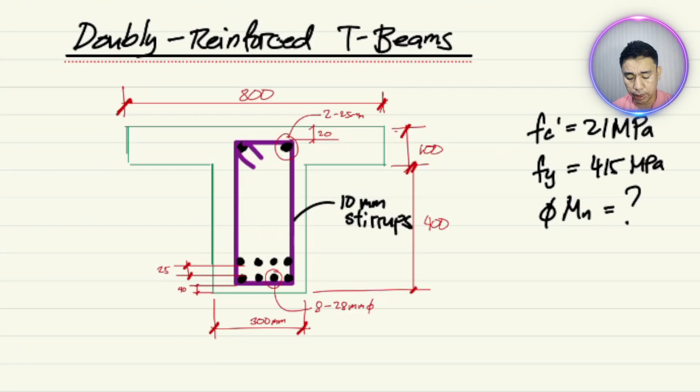Okay, so we finished already about T-beams, which is mostly singly reinforced. Now we will move further to doubly reinforced T-beams. So this is a T-beam and then doubly pa talaga yung reinforcement. So can you imagine the possible steps in designing or investigating a doubly reinforced T-beam.

Remember in doubly reinforced, may mga calculations pa tayo na mag-assume ng stress ng F ng steel, kung mag-yield ba siya or not. And then meron tayong iteration ng calculations because of that assumption. And then we need to check that assumption if that is correct.

Now sa T-beams naman, i-check naman natin yung compression area, kung mas mababa ba sa thickness ng flange, lower than the thickness, deeper than the thickness of flange. So iba naman yung analysis kung A is less than T. If A is greater than T, meron na yung Z.

So pag pinagsabay mo ito, doubly reinforced and then T-beam, so you expect a medyo complicated na calculation. But the step is the same. Okay, so we just have to keep iterating. So that's why I'm encouraging you to always solve a lot of problems, so in that way we can familiarize the steps in designing.

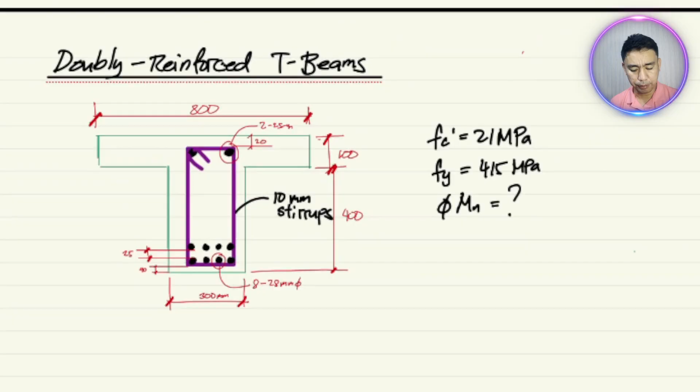So I will go directly to examples, solve examples for this one, for the doubly reinforced T-beams. So we have here in this example, sorry, we have a T-beam. Okay, I'll just zoom in.

So a T-beam, yung flange niya is 800 mm. This the unit is millimeter. And then ang thickness ng flange is 100 mm. Okay? And then the BW, ang BW natin is 300 mm. And this, meron siyang 10 millimeter na stirrups.

Ang stirrups, we will learn that after this topic about stirrups. But let's say that is a stirrup, 10 mm, and then yung nakapaikot na reinforcement. So meron tayong sa top, dalawang 25 mm, yung black ito, dalawang 25 mm. This is 25 mm, and then yung clear distance sa top is 20.

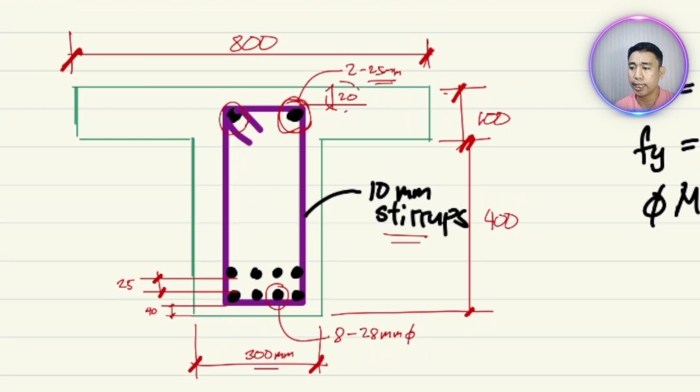Actually, sana hindi na ito sinali dito yung mga calculations. Mas mabuti kung theoretical na lang sana kasi AS prime and then AS sa baba, just like the doubly reinforced. Pero in the book, sinali pa niya itong mga distance. We could deal on this topic on the last part, yung sa detailing. But for the sake ng book, sige, sabay na lang natin ito.

So ang binigay niya dito na given is yung 20 mm. Yung clear distance yun siya, from the top ng beam to the topmost fiber ng stirrups. So that means to solve for D prime, kailangan pa nating i-calculate yung sa gitna ng stirrups hanggang dito. That is actually D prime, right? So we need to consider the diameter ng bar and then the diameter ng stirrups and then the 20 millimeter.

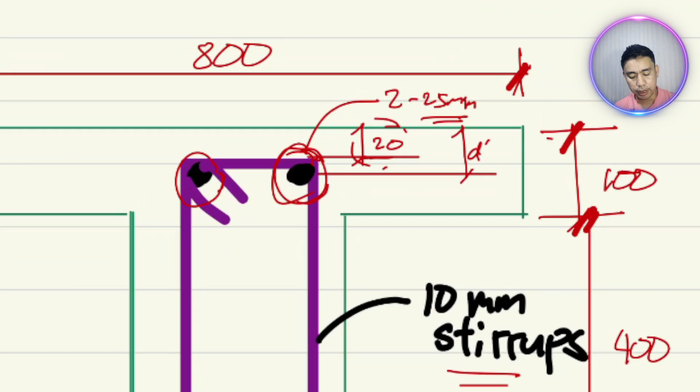Okay, the same rin dito sa baba, meron tayong reinforcement na nakaganyan, parang nakahanging. I don't know how to do it in practice, minsan gina-kumpul-kumpol na lang ito, bundle na siya. Pero theoretically, meron siyang spacing na 25 mm, at yung clear distance dito is 40. And then these are 28 mm diameter. Ang phi nito is means diameter, ha, so 28 mm diameter.

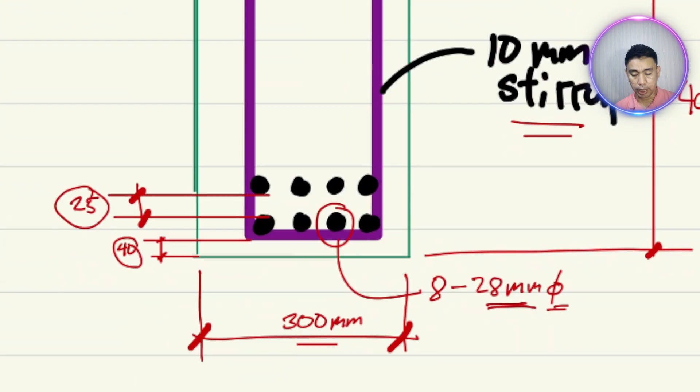And then the given FC prime is 21 megapascal and FY is 415 megapascal. Let's solve for phi mn, okay, this is actually phi mn.

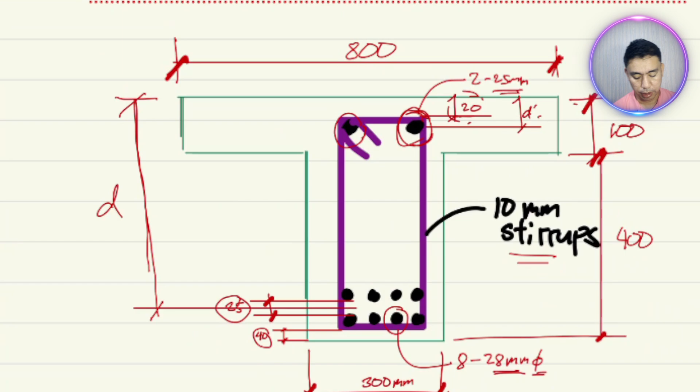So the first thing we need to solve is let's solve first the D prime and then the D. Ano yung D? Ang D is the distance from the center of the reinforcement, tama, right? Let me correct, parang ganyan, ito yung D natin, right? So paano yan? Let's solve for D.

So our D here is equal to, ano yung total depth? I-add natin itong total depth natin, 100 and 400, and then i-subtract na lang natin itong mga distance dito. So this is actually, D is equal to 500. Ang 500 galing yan dito sa 100 and 400.

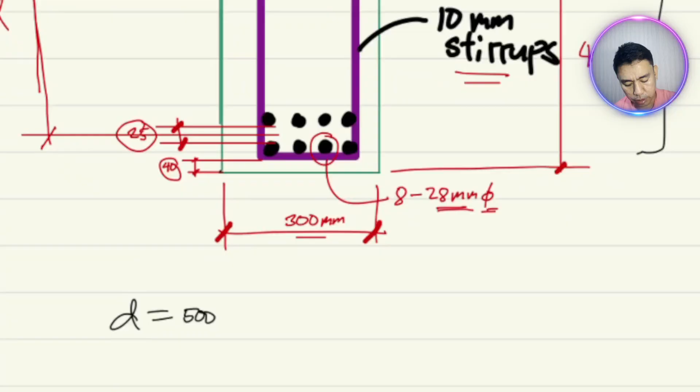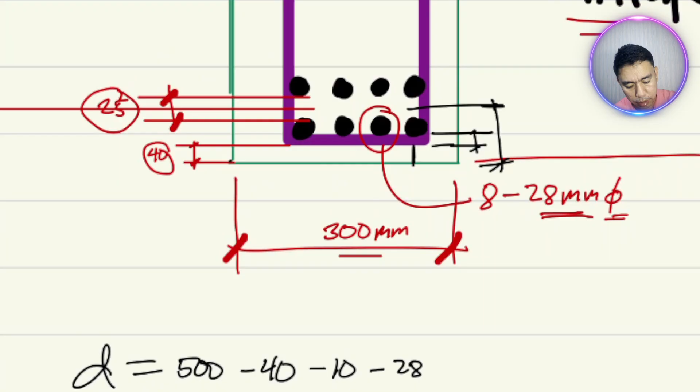So 500 minus the clear distance of 40, right, and then minus the diameter. So ito yung clear distance, 40, and then diameter ng stirrups, so this is minus 10, kasi nga 10 mm itong diameter. So that distance is 10. Minus the diameter ng rebar sa baba, sorry, minus 28. Okay, and then halfway lang. So actually ito lang yung ano, yan, so halfway, that is, ano yung clear distance? 25, right? So this one will become minus 25 over 2, halfway ng 25. Yan yung magiging D.

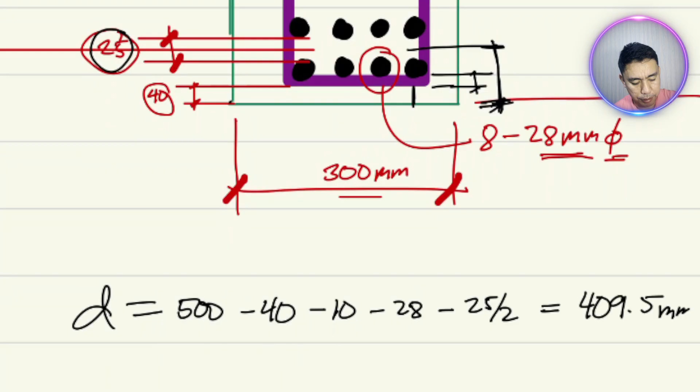So this will result to 409.5 millimeter. Okay, how about our D prime?

Our D prime natin sa taas, right? So i-add naman natin dito kasi galing from the top tayo. So 20 plus diameter of stirrups plus half of the diameter kasi nga sentro lang tayo ng reinforcement. Ito yung D prime. So this will be 20 plus 10 diameter ng stirrups plus halfway ng diameter ng main reinforcement 25 over 2. So this will be 42.5 millimeter. Pangit ng writing, okay.

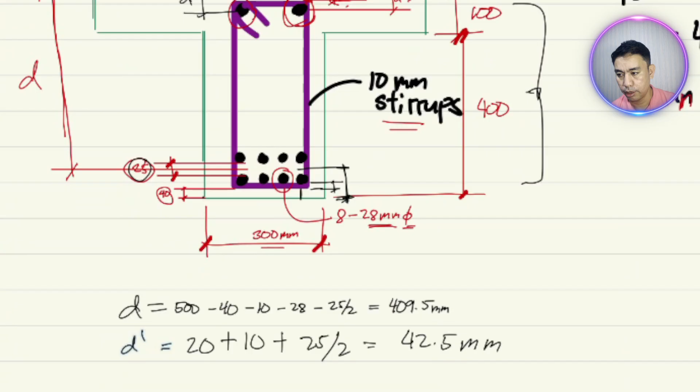So ang stress analysis naman natin dito, ano siya, T-beam. So ang first is yung sa T-beam. Sa T-beam, di ba, dalawa yung compression, meron tayong C1 at saka C2, and then meron tayong T1. Siguro ipakapalin ko na lang. So ito yung C1, C2, and then T1, right? So dapat magka-equal itong C1 plus C2, it should be equal to T1.

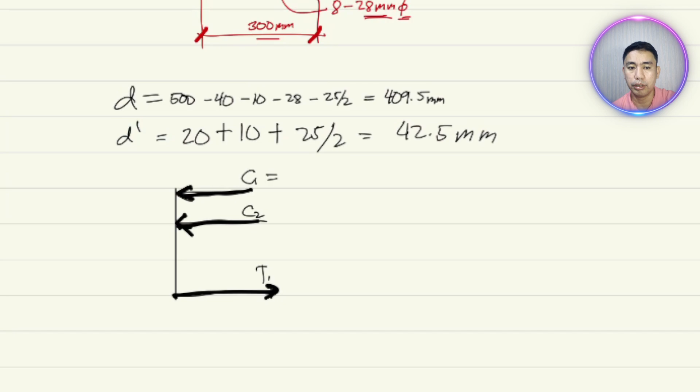Okay, ano yung C1 natin? Ang C1 is yung compression ng flange, right? So this is basically 0.85 FC prime times area. Anong area? Thickness ng flange times BF. Yan, so kumbaga kung yung sa T-beam natin, kung yan yung T-beam natin, ito yung area ang ginamit ko sa C1, ito yung C1 alone sa taas. Ang sa C2, ang sa C2 is dito.

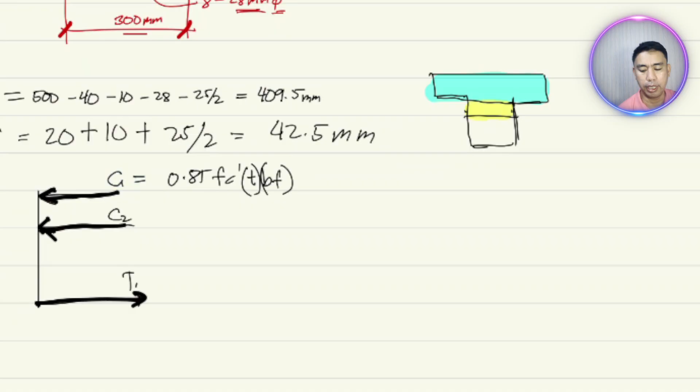Ayan, so ito yung sa C1, ito yung sa C2. Okay, so if I'm going to write this here, ang C2 natin is equal to, kasi concrete ito, so this is 0.85 of FC prime times area. Ano yan? This is actually from the distance Z, and then this is our BW. Okay, so ang area nitong naka-yellow is Z times BW. Ito sa taas is our BF.

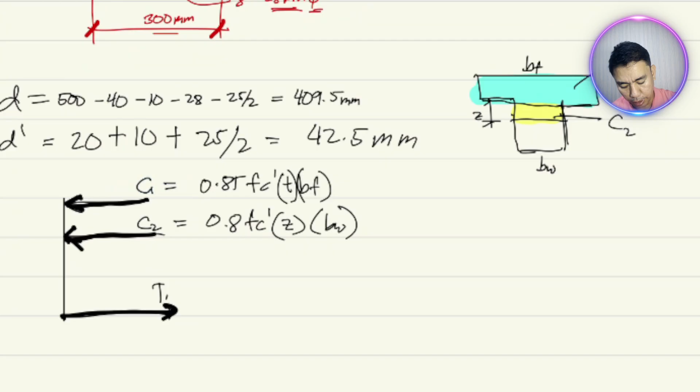And this should be equal to tension 1, which is AS1, yung sa baba, times AS1 FY. Okay, if, actually FS yun siya. FS, okay.

Sorry, wait, I have runny nose.

So yung sa doble naman, kasi this one is, the first one is yung, actually this is the MU1. Yun yung capacity ng first couple. Ang MU2 is yung sa second couple.

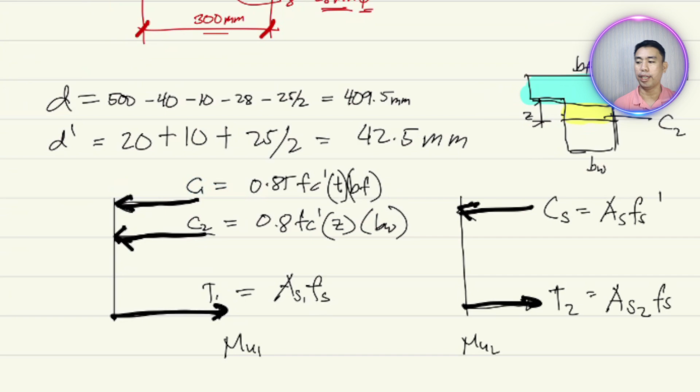Ano ngayon? This is the compression due to steel and then tension 2. Ano yung compression due to steel? Simply AS FS prime. Ang tension 2 is just equal to AS2 times FS. Okay, so yun yung free body diagram natin.

Now, page... So dito naman tayo mag-assume. We need to assume first. Okay, assume that all steel yields.

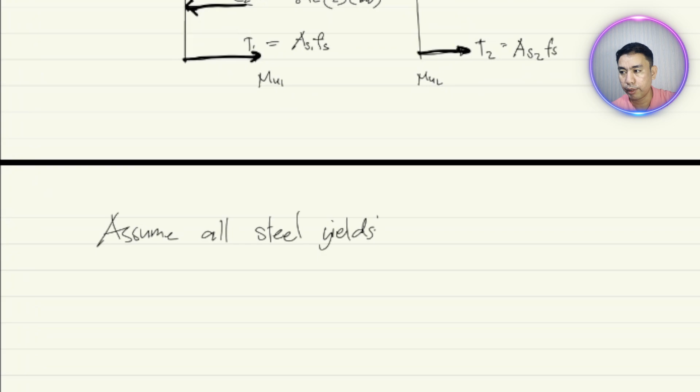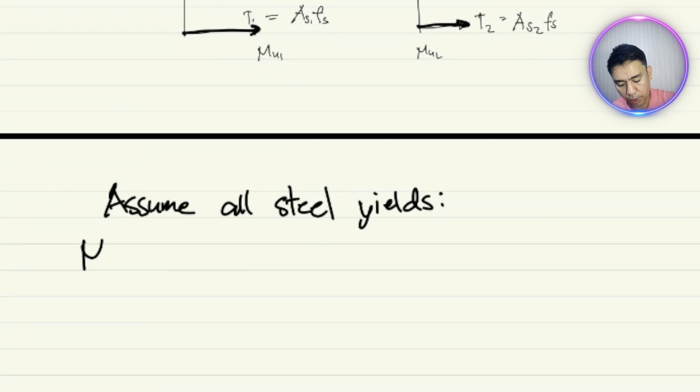So anong mangyari? Using MU2, itong result sa MU2. Let me delete this one. Assume all steel yields. So using the equation sa MU2, ito actually ang ginamit ko sa MU2. This equation.

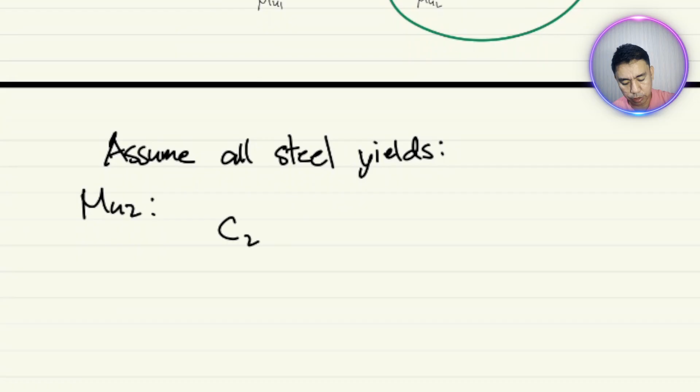Okay, so it will be C2 is equal to T2, right? If you sum forces along horizontal is equal to 0, so CS is equal to T2. So why did I put C2? This is supposed to be CS. So anong mangyari? AS prime FS prime is equal to AS2.

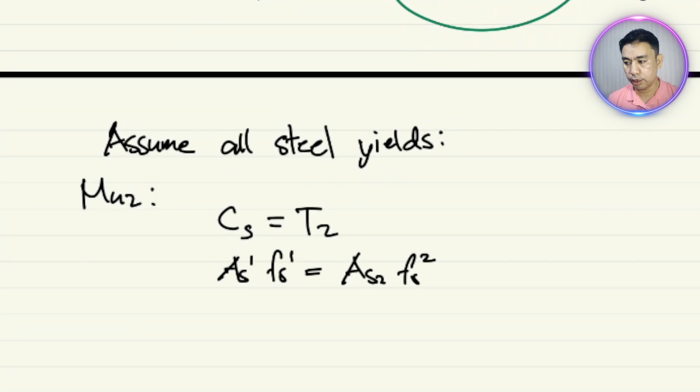FS2. Since FS, nag-assume tayo na all steel yields, meaning kung mag-yield, ang value is the Fy. So do we have AS prime Fy is equal to AS2 Fy? Bakit naging square dito? Prime pala yan, AS2, not prime. Sorry, AS2 Fs. So pareho sila Fy, that means cancel lang ito. Kasi nga Fs is equal to Fs prime equals to Fy.

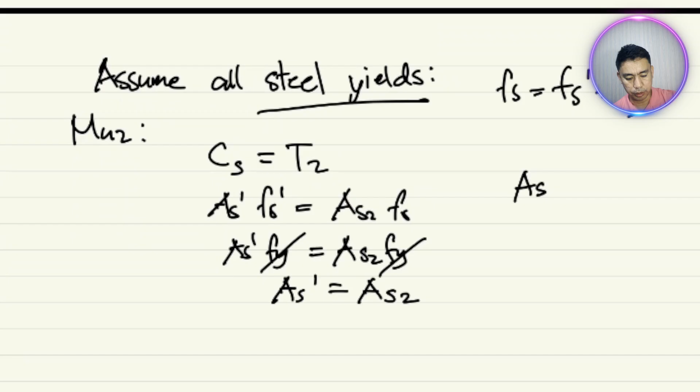So that means ang As prime natin is equal to As2. So by the way, what is our As2? As2 sa taas, ayan, dalawang 25 mm.

So solve na lang natin. 2 times pi over 4 times 25 squared. This is actually 981.748. Ano pa pala? Okay, and then ang AS, yung

total reinforcement sa baba, AS is equal to 8 na 28 mm. Pi over 4 times 28 squared. This will equal to 4,926.017.

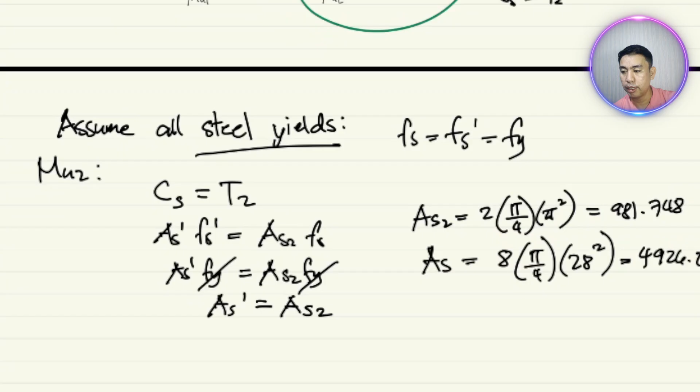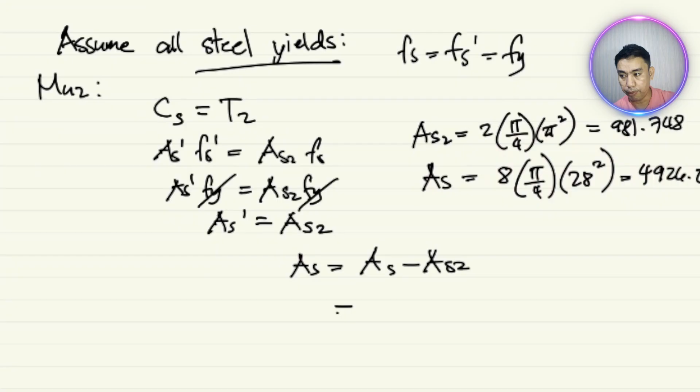Okay, so from there, since AS prime is equal to AS2, that means AS1 is actually AS minus AS2. So ang value ng AS1 natin, para saan yung AS1? Actually dito yun siya, ito yung AS1. Para ma-solve natin yan mamaya.

That equation, so AS1 is equal to AS minus AS2. So this is 4,926.017 minus 981.748. So this will equal to 3944.269. Okay, so meron na tayong AS1.

Ang point ng pag-solve ng AS1 dito para magamit natin ito na equation. This equation. Okay. So ano yan na equation?

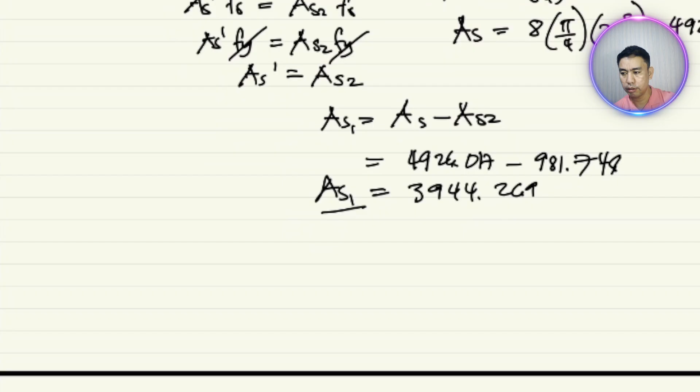So at first we will assume na isang isang area muna itong dalawa, C1 and C2. Okay, so using that first equation, using MU1 na equation, saan yung MU1? Ito na equation, MU1.

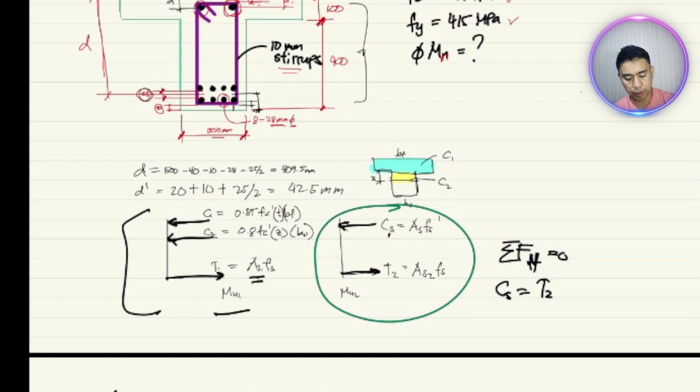So this is the compression of concrete should be equal to tension 1. So ipagpalagay mo natin na ang compression ng concrete is 0.85 FC prime times area of concrete, right? Yung area ng concrete under compression only. So this is equal to T1. Ano yung AS? T1 natin is AS1 FY. Okay?

So bakit natin sinolve natin ang AC? Ang point dito is masolve yung AC. Kasi nga pag masolve natin yung area ng concrete, i-check natin, ito yung required na area ng concrete. I-check natin kung ang area ng concrete actually na nag-resist is greater ng area ng ano siya, ng flange.

So kung greater than area ng flange, that means T-beam analysis. Pero kung less than area ng flange, meaning rectangular beam analysis siya. Okay? Remember that one, yung T-beam is parang it will act as rectangular lang siya kung ang A is less than T. Okay, so kaya kailangan natin i-solve yung AC.

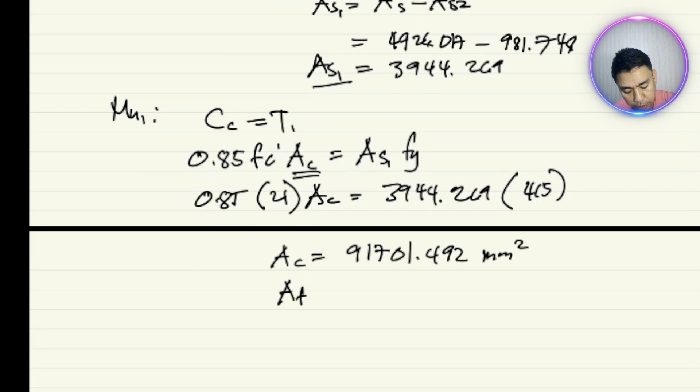So ang point ko dito, pag found out natin na greater than area ng flange siya, then that means T-beam ang analysis. But if less than, then singly reinforced, rectangular analysis lang siya.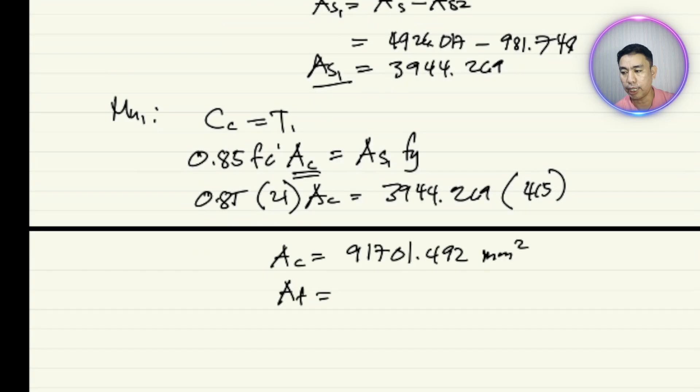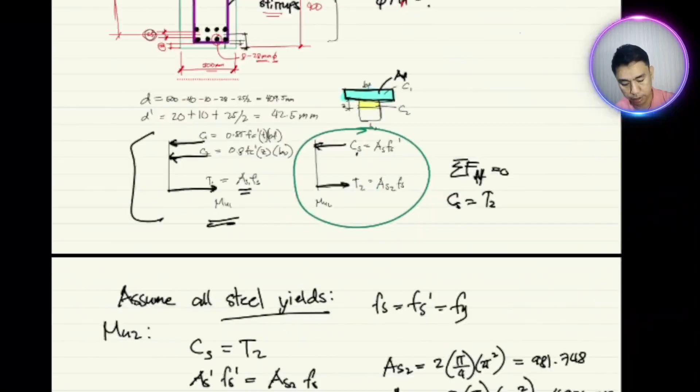So ano yung area ng flange? Ito yung dinamin ko na area ng flange, ito actually, yan, area ng flange. Okay, so what is that? That is just 800 times 100, right? So ang area ng flange natin is equal to 800 times 100. This is 80,000.

So this is 80,000. Compare mo sa area ng concrete, 91,700. So that means greater siya. So ang area ng concrete is greater than AF. So that means yung area ng flange alone is not enough for T-beams.

Kailangan pa niya mag-expand sa baba, dun sa web part. So hanapin natin yung Z. Itong Z actually, yan, this one, Z. Hanapin natin yan na value, kasi meron naman tayong area required ng concrete.

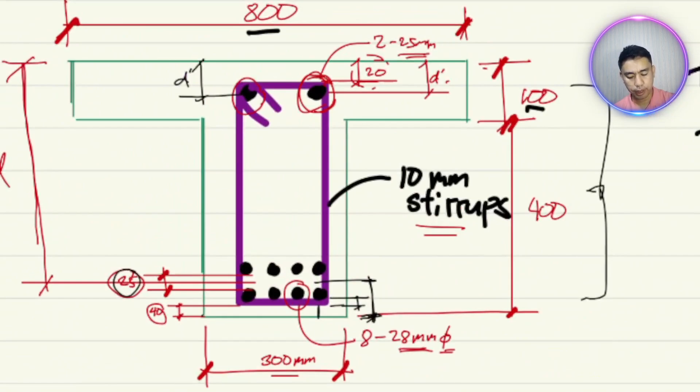So we can use that value. Area of concrete is equal to area of flange plus, ano yan siya? Itong Z. Actually dito yung, if you look at here, yan na area sa baba. Okay, which is ito yung Z natin, right? So that is just Z times 300. Can look at here, Z times 300.

So going back here, this is 300 Z. Let's input the value. We have 91,701.492. Area of flange 80,000 plus 300 Z. Then we can have the value of Z, 39.005 millimeter. So ang total A natin, hindi yung beta 1C, okay?

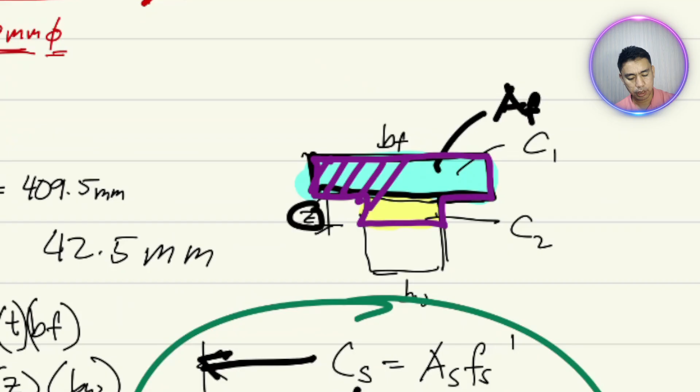Wala pa tayo dyan, doon. So ang A natin is ang total depth ng compression. So what I'm saying is ito na lahat ang area ng concrete under compression. Yan. So hindi na siya rectangular, T-beam na siya. So ano yan na area?

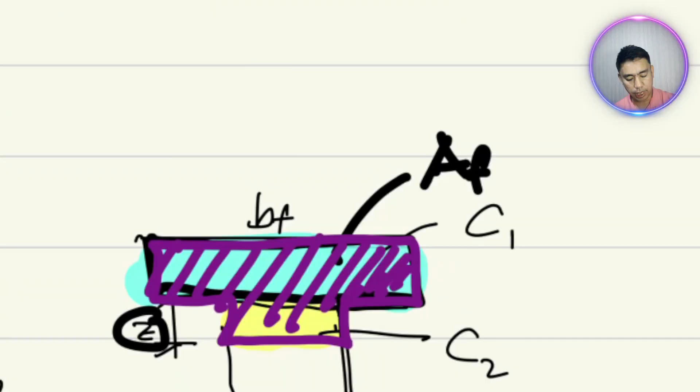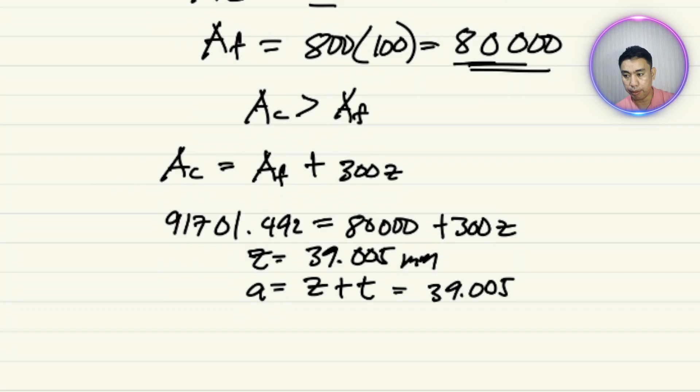So ang total area, ito yung distance na A, right? So let's go back here. It will be A. So ang A natin is equal to Z plus the thickness ng slab. So this is equal to 39.005 plus the thickness 100. So this is 139.005. So dito na tayo yung C.

Ang C is equal to A over beta 1. By the way, ang beta 1 natin, 21 megapascal man yung Fc prime, so that is automatically 0.85. So A is 139.005 over beta 1 of 0.85. So what will happen, this is 163.535 millimeter. So yun yung C.

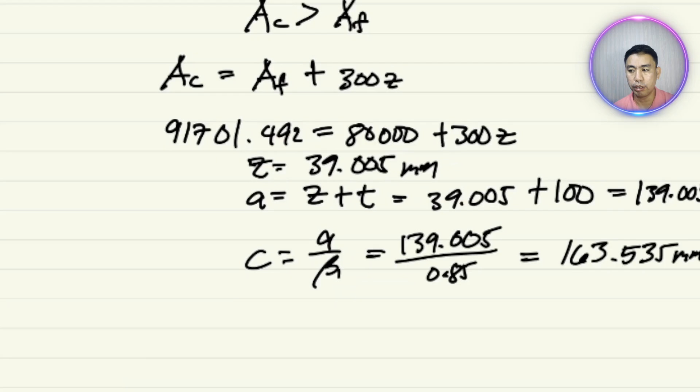So ang point dito, masolve natin yung C. Bakit? We need to check your assumption. So check assumption. Ano yun? Fs is equal to 600 times D minus C over C.

So this is 600 times D. D natin is 409.5 minus 163.535 over 163.535. This is equal to 902.431. So this is greater than Fy. Ang Fy natin is just 400, sorry, it's 415. So this is greater than Fy. So okay yung assumption natin kasi we assume na greater than Fy siya lahat.

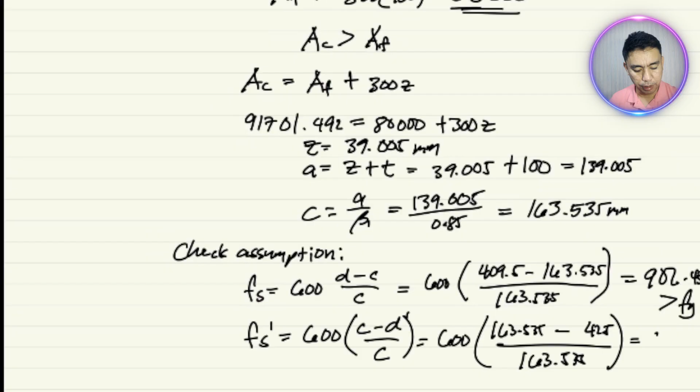Yung first, okay siya. How about Fs prime? Ang Fs prime is 600 times, sorry, this should be C minus D prime over C. So this is 600 times C. Ang C natin is 163.535 minus D prime 42.5 over C 163.535. So this will be 444. So this is still greater than Fy. That means tama yung assumption natin, compression yields.

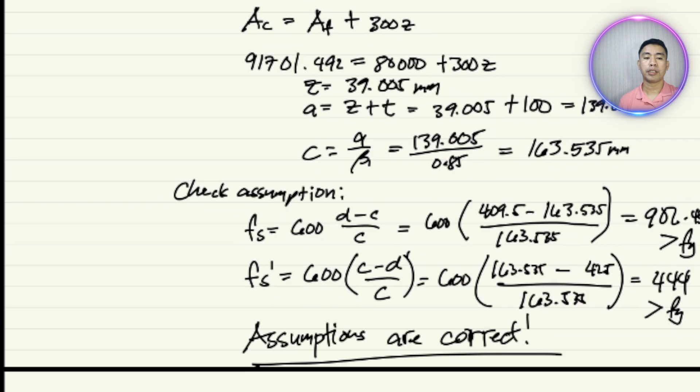So let's say assumptions are correct. So what will happen? Then we can solve the phi Mn. Ano yung phi Mn natin? Is equal to phi times C1 times D minus T over 2. Ito yung formula natin, okay, plus phi times C2 times D minus T minus Z over 2. Then plus phi of compression due to steel times D minus D prime.

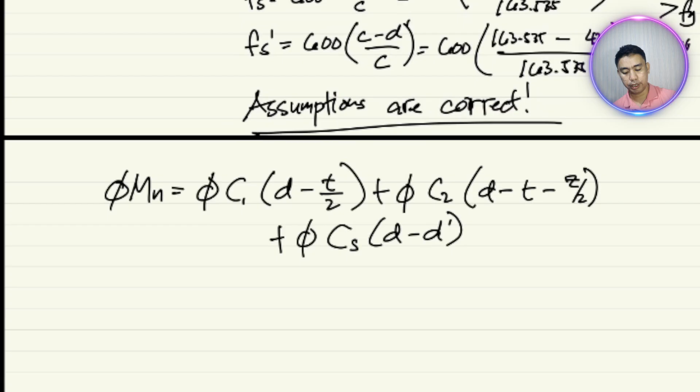By the way, what is phi here? Ang phi, magbase yan siya sa Fs natin. Kung ang Fs natin is greater than 1,000, then that is 0.9. But if less than 1,000, but greater than Fy, we need to use the transition: 0.65 plus 0.25 times 902.431 minus 415, ito yung Fs, minus over 1,000 minus Fy of 415. So this is equal to 0.858.

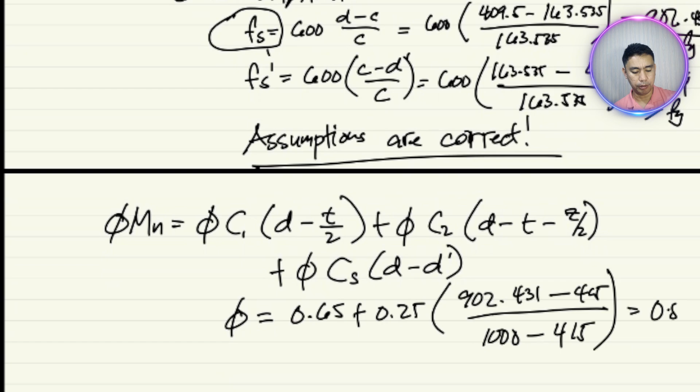So we can expand this actually. Phi Mn is equal to phi, ano yung C1? 0.85 Fc prime, thickness of flange, times Bf, times D minus T over 2, plus phi times 0.85, ito yung C2, Z Bw times D minus T minus Z over 2, plus phi. Itong Cs, compression ng steel, CS is equal to As prime Fs prime, D minus D prime.

Alright, so let's input the value here. Ang phi natin is 0.858. Okay, medyo mahaba ito. 0.85 times Fc prime 21 times thickness ng flange 100 times Bf is 800, times 409.5 minus 100 thickness over 2. That is actually A for the flange.

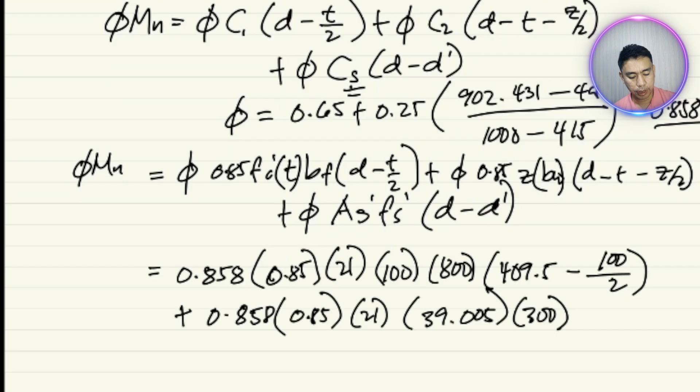Then dito ko lagay sa baba, plus 0.858, yeah that should be correct, 858 times 0.85 times 21 times 39.005 times 300. Then multiply it by 409.5 minus 100 minus 39.005 over 2.

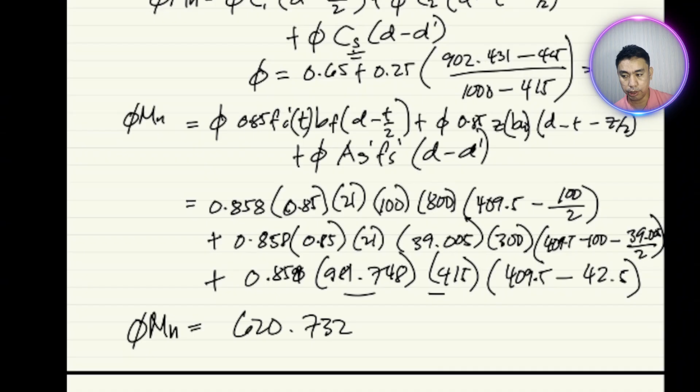Then plus yung compression ng steel, 0.858 times 981.748 times 415, that is As Fy, okay, times 409.5 minus D prime 42.5. So if you will calculate this one, you will come up with a value of 620.732 kilonewton meter. Okay.

So the good thing here is nag-assume tayo na ang steel is nag-yield. And then it turns out na nag-yield talaga yung steel. Now what if hindi siya nag-yield? So let's proceed to another example here.

So in the second example, we have 800 yung Bf, thickness 100, idiretso na ko na lang bigay yung mga given. Okay, and then D is 412.5 and then D prime is 40. Bw is 300. Then As natin is anim na 25mm. And then As prime, dalawang 20. Fc prime is 21 megapascal and Fy is 415. Let's solve for phi Mn. Okay, phi Mn.

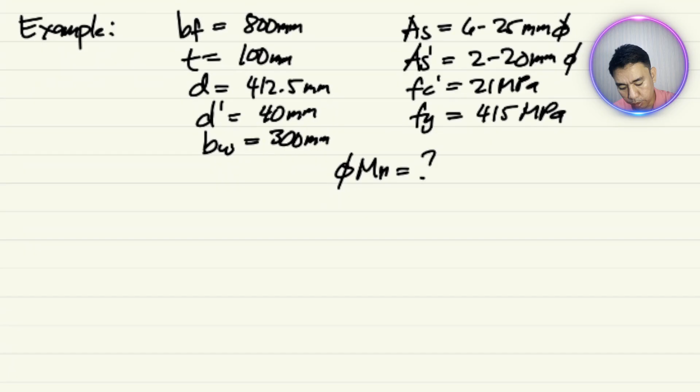So I'll jump directly to assumption. Assume all steel yields. So we have compression of steel equal to tension 2, so this is AS prime Fs prime equal to AS2 Fs. But since Fs prime is equal to Fs is equal to Fy, kasi nag-assume tayo na mag-yield itong dalawa, equals to Fy, so this one will be cancelled. So ganun pa rin, yung AS prime natin is equal to AS2.

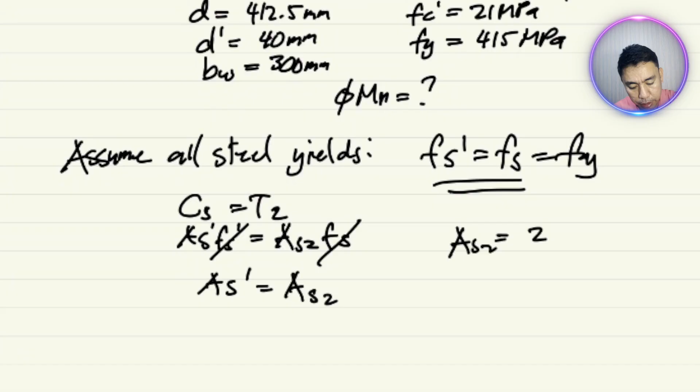Ano ba yung AS2 natin? Ang AS2 natin is dalawang 20 mm. 2 times pi over 4 times 20 squared. This is equal to 628.319.

Okay, ang AS1 natin is equal to AS minus AS2. Actually galing sa equation na AS is equal to AS1 plus AS2. So practically, yung total area ng steel sa baba ay nahati siya to AS1 and AS2. Wherein part ng yung AS1 natin is for the first couple, yung area ng concrete versus steel.

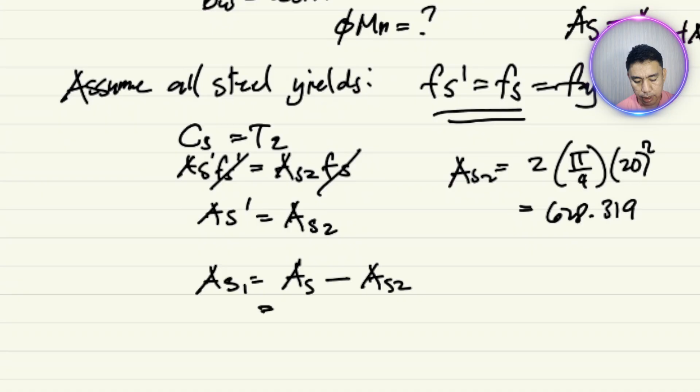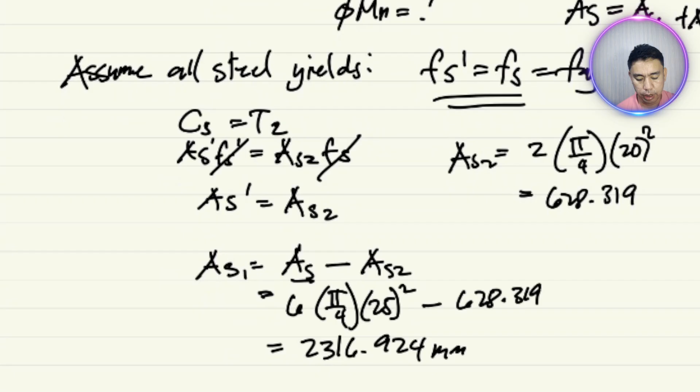Ang AS2 natin is for the second couple, yung steel to steel. Okay, so yung AS1 natin isolve natin. Ano yung total AS? Meron tayong total AS, 6 na 25 mm, so we can write 6 times pi over 4 times 25 squared, right? That is basically pi d squared over 4, merong anim, so times 6 minus 628.319. So this is 2316.924 mm squared. So let's proceed to next equation.

C compression ng concrete is equal to T1. So ito, solve naman tayo ng area ng concrete. So what will happen, this is 0.85 Fc prime, area ng concrete. I-generalize muna natin itong dalawa, and then i-check natin sa area ng flange. AS1 times Fy.

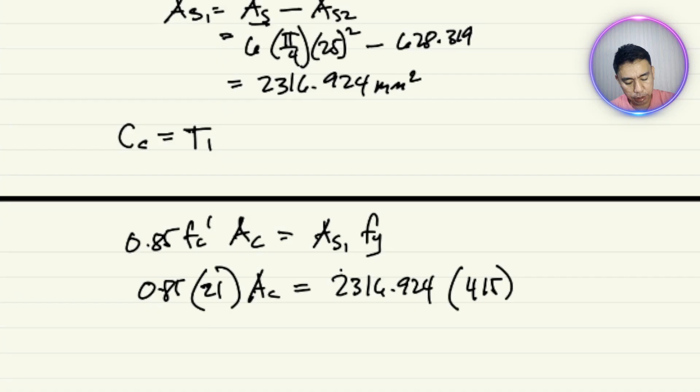Sorry for my runny nose. 0.85 Fc prime is 21 times area ng concrete is equal to AS1, 2316.924, times Fy. Nag-yield siya, so this is 415. Solving for AC here, AC is 53866.861 mm squared.

Ano yung area ng flange? Ang area ng flange is 800 by 100, so this is 80,000 area ng flange. Ang kailangan lang ng area ng concrete is only 53. Ang area ng flange is 80, meaning sufficient yung area ng flange to combat the tension.

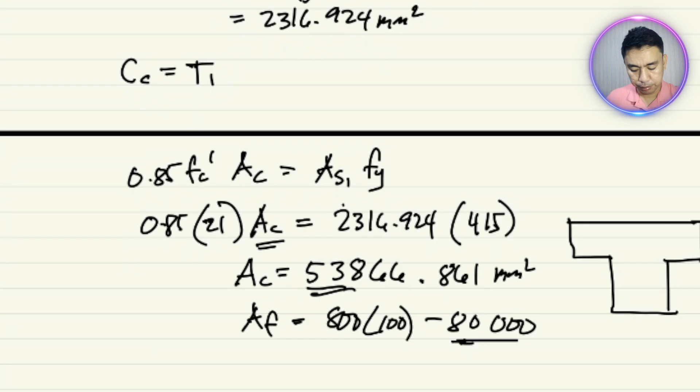So what will happen sa T-beam natin, if I will draw here illustration, yan, ito yung T-beam natin. Hanggang dito lang yung compression area. If I'm going to, yan, kung makita nyo, yan lang yung compression area. So the good thing kung ganito is automatically yan na yung A. Okay, then you don't have to solve for Z. Yung Z is yung sa below pa yan ng flange.

My apology, nag-hang up yung tablet ko. Wait, nag-hang yung tablet ko.

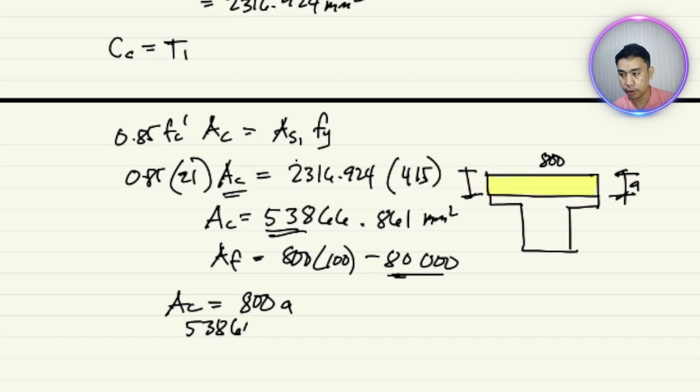So solve natin itong A. Ano yung A? A, well, that is basically 800, so ito yung 800, right? So ang area ng concrete, yung area ng yellow, 800. So area ng concrete is equal to 800 times A. Okay, meron na tayong area ng concrete. This is 53866.861 is equal to 800A.

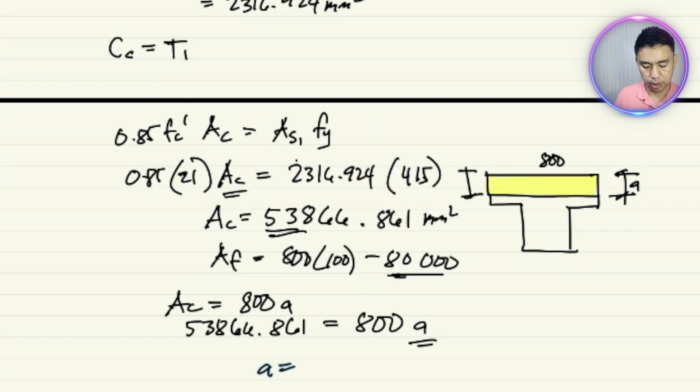Solve for A, so ano ngayon yung A? Wait, bakit hindi magalaw yung, let me, ito na, gumalaw na. So ang A natin is just 67.334 millimeter. So tingnan nyo, ang A is just less than 100, so hindi na ubos yung buong flange natin.

So given the A, we can solve for C, right? A over beta 1. Beta 1 natin is 0.85. So this is 67.334 over 0.85. So this is 79.216. From here, we can check our assumption. Okay, so check.

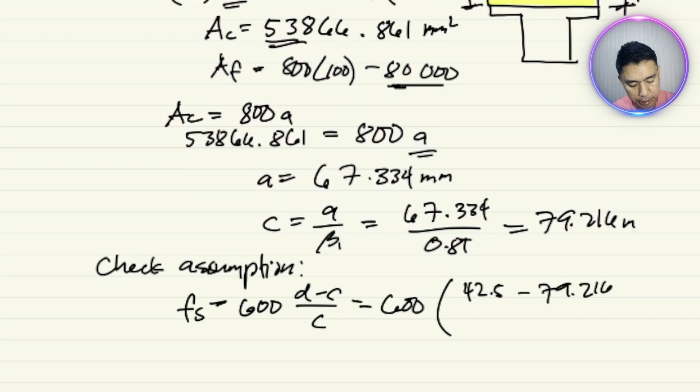Check natin yung assumption. Ano yung Fs? 600 times D minus C over C. So this is 600 times D 412.5 minus 79.216, to yung C, 79.216. This is equal to 2524.369. So this is 2524. This is greater than Fy. So tension still yields.

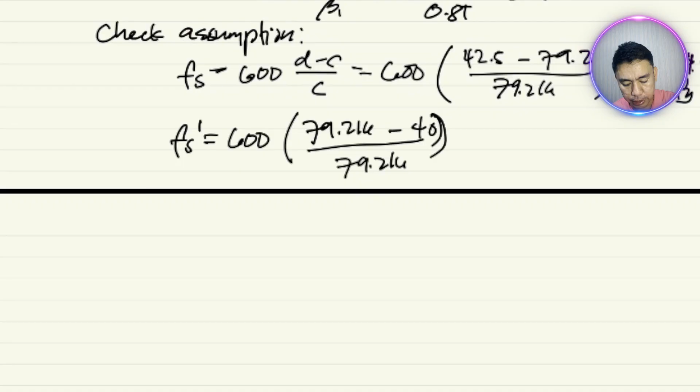How about, let's add, sorry, Fs prime. 600, I'll jump directly to the value. 600 times 79.216 minus d prime of 40. Divide natin sa 79.216. This is equal to 297.031. So, see here, 297, this is less than Fy, which is less than 450.

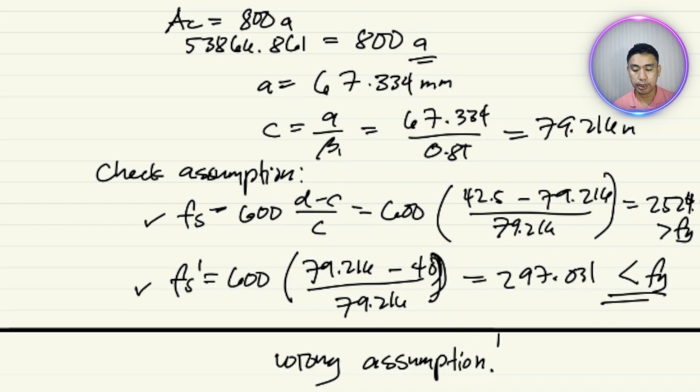So meaning, wrong assumption. Mali na yung assumption natin. So mag-assume naman tayo ulit. What will happen? Kung mag-assume tayo, kasi ang lumabas dito, ang Fs nag-yield, ang tension nag-yield. But yung compression still is not, hindi nag-yield.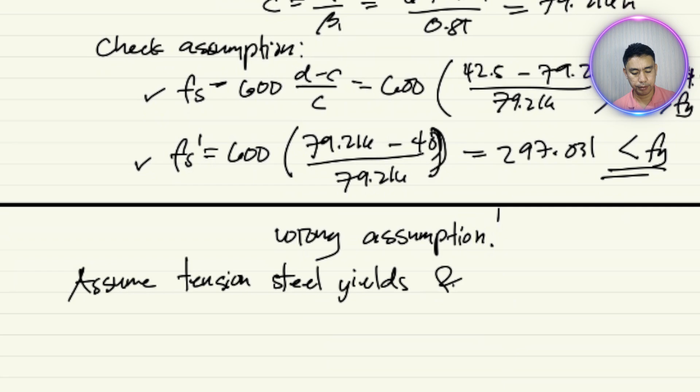So ang next assumption natin, ano na natin, conform na natin sa output natin. Okay? So assume tension steel yields and compression steel, ah sorry, compression steel does not yield. So ang tension steel nag-yield, but ang compression sa taas na steel hindi nag-yield.

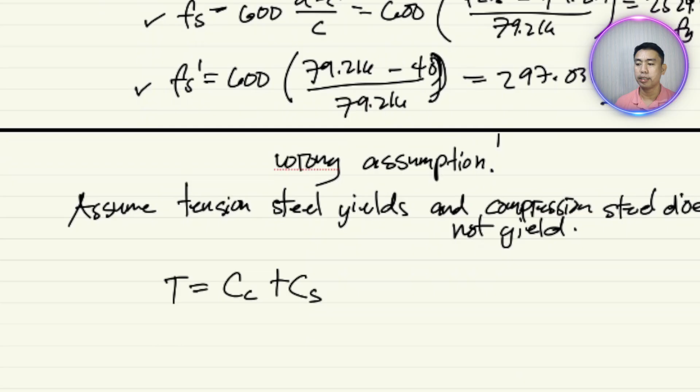Okay, so let's go back to the equation. Tension is equal to compression ng concrete plus compression ng steel. So ano yun? Tension, ano yung tension? AS Fs is equal to 0.85 Fc prime A BF, okay, A times BF, plus AS prime Fs prime.

Okay, so ano yung AS? Hindi natin solve yung S, no? So sulat lang natin: 6 times pi over 4 times 25 squared.

So ito sa tension, ito yung tension steel. Fs natin, so ang assumption natin dito nag-yield siya, so we can put 415. So yun lang yung difference. Kung ano yung in-assume natin na mag-yield, then we can put directly the value of Fy. Then doon yung Fs na equation sa hindi nag-yield na assumption natin. So this is 0.85 times 21.

So ano itong A? Itong A, actually, itong A, ito yung beta C, beta 1C, right? So we can write 0.85 times C times 800. Ito yung BF, 800. Plus AS prime, plus, sulatan na natin, 2 times pi over 4 times 20 squared.

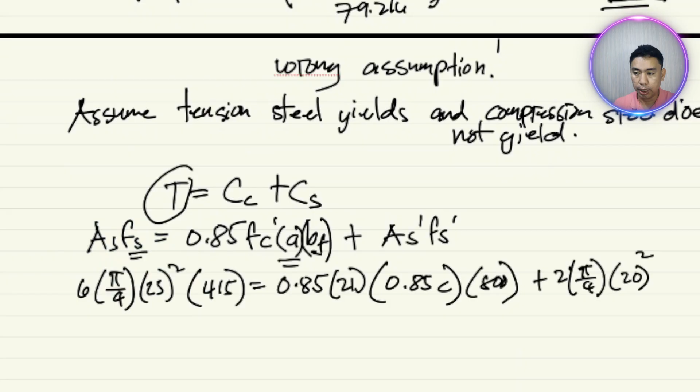Ayusin natin. 20 squared times. So dito na yung, ito yung value ng Fs prime. Kasi ang assumption natin is hindi siya mag-yield ng Fs prime. So dito natin ilagay yung equation na 600. May space pa ba? Can I put that here?

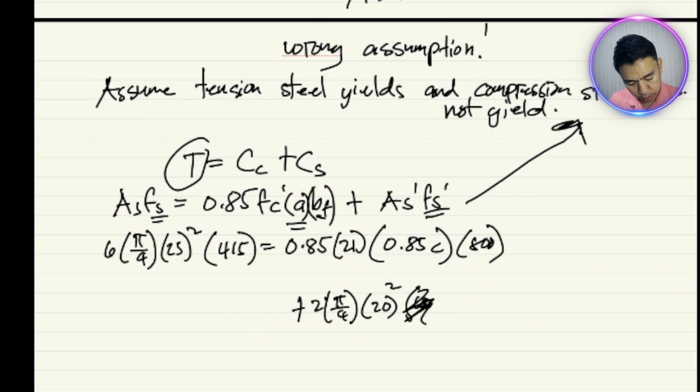So this is, I'm going to write 600 times C minus D prime over C, okay? Kasi nasa Fs prime tayo. So we solve for C. Solve yung C kasi meron mga equation ganyan.

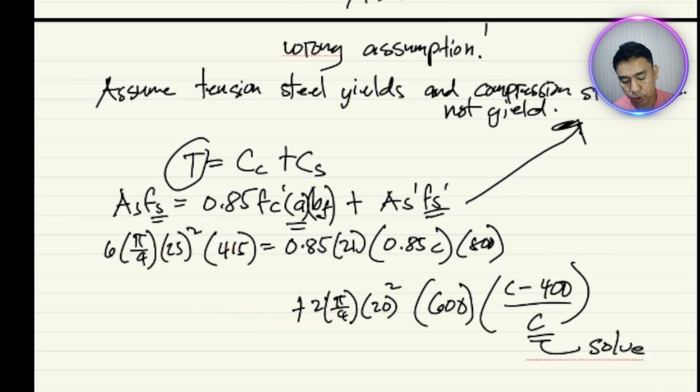So using our calculator, we can solve the value of C equal to, so it turns out it's equal to 84.365 millimeter. Then from C, we can check our assumption.

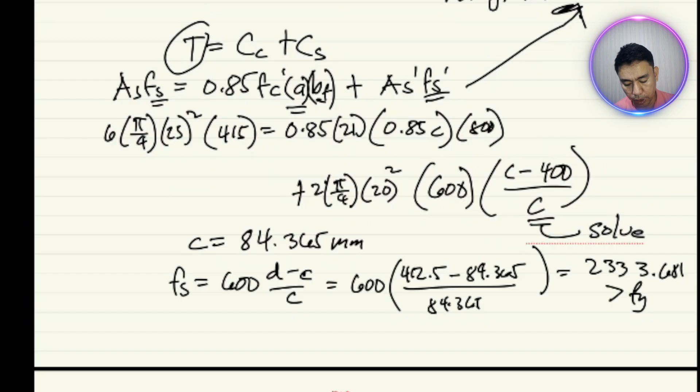So Fs is 600 times D minus C over C. This is equal to 600 times D. Ang D natin is 412.5 minus C, 84.365, over 84.365. This is 2,333.681. This is greater than Fy. So okay yung assumption natin kasi yung assumption natin tension steel yields.

How about the Fs prime? Fs prime natin is 600 times C minus D prime over C. Okay, so wag yung interchange yung value ng Fs and Fs prime ha. So this is 600 times C, 84.365 minus 40 over 84.365. So this is actually equal to 315.522. So this is 315. This is less than Fy. So kahit less than Fy, correct pa rin yung assumption natin, meaning does not yield yung Fs prime natin. So assumptions are correct.

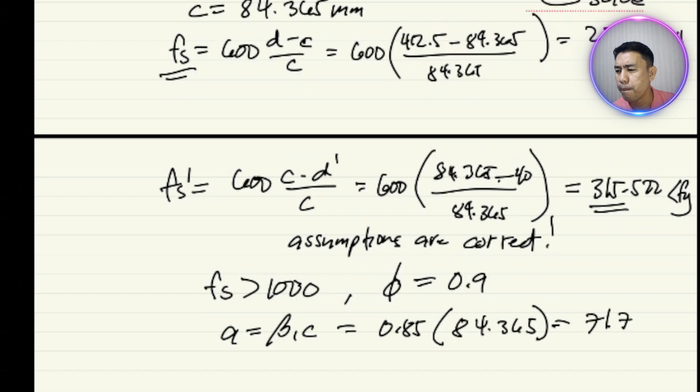Okay, so check natin yung Fs. Ang Fs is greater than 1,000, right? So ito yung baseline natin. Therefore, phi is equal to 0.9, so that is tension control. Meron pa tayong A, wala pang A. So A is equal to beta 1 times C, right? So beta 1 is 0.85 times C, 84.365. So this is 71.710. Yun yung value ng A.

So we can solve now phi Mn. So dalawa, compression ng concrete. So ito, isa lang dito sa concrete kasi nga hindi umabot sa yung sa baba ng flange. Yeah, baba ng flange yung compression natin. So within flange lang tayo.

This is 0.85 FC prime A times BF. Yan yung area ng concrete. D minus A over 2 plus AS prime FS prime D minus D prime. Okay.

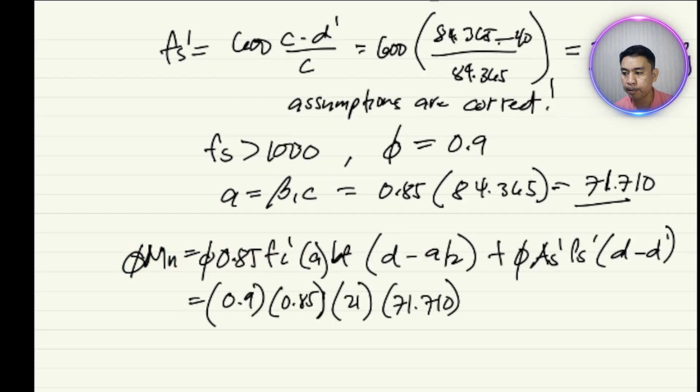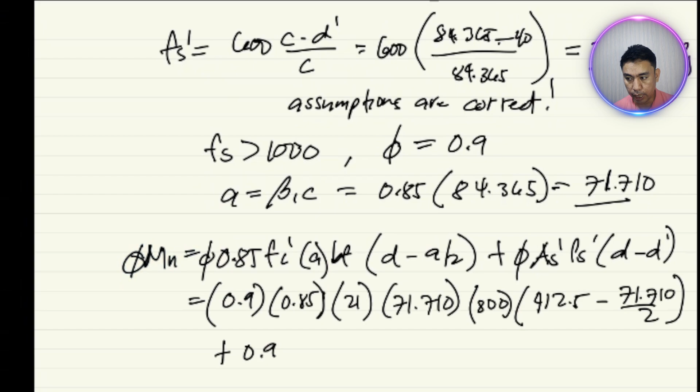Let's put the value. Meron pa palang phi. Merong phi dito. So this is 0.9 times 0.85 times FC prime 21. A is 71.710 times 800. BF D is 412.5 minus 71.710 over 2. Dito ko lang natin yung sa baba. Plus 0.9 times 2 pi times 20 squared over 4. Okay.

Times 315.522 times 412.5 minus d prime 40. Okay, then we can solve phi Mn is 413.580 kilonewton meter.

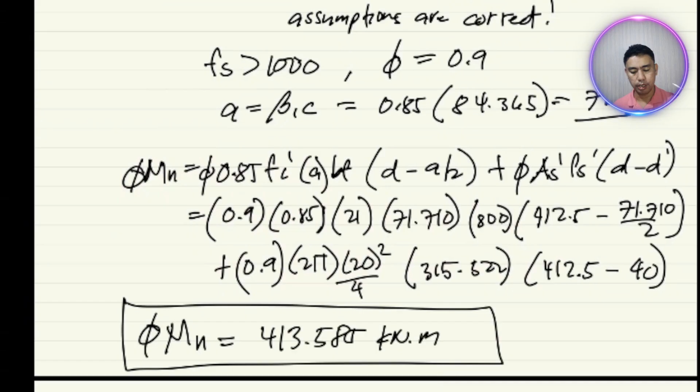So nakita niyo parang doubly reinforced lang siya na investigation. Assume and then check. So nagdagdag lang yung pag-solve ng A, kung ang A is less than thickness ng flange or greater than thickness ng flange. So yun, so kung greater than thickness ng flange, dalawa yung compression natin, yung sa flange at saka yung sa baba ng flange. Yun lang. So actually sa second example, this is solving area, so this is design part. So gano'n naman, parang pareho lang ito ng ano.

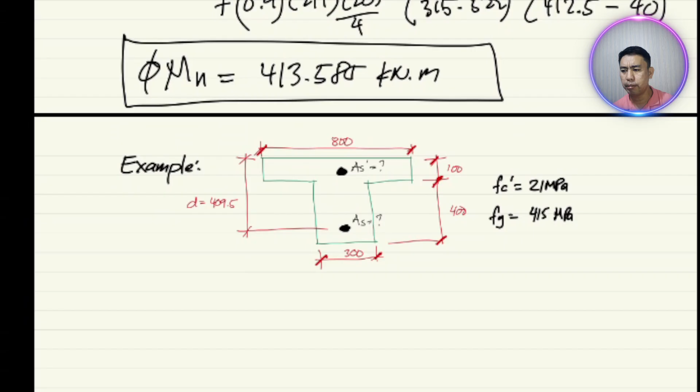So I would like you to answer it by yourself. Itong designing, say more than 1 hour na tayo. So maging boring na pag more than 1 hour na tayo. Okay, so make sure to solve it by yourself.

Itong designing ng AS is parang doble reinforced lang siya na steps. So kagandahan sa design is we do not have to assume. It's like yung investigation, mag-assume muna tayo, okay? Kasi sa designing, kung ano yung makuha natin na FS, yun na diretso yung gamitin natin sa equation. So find the AS, okay? So i-check lang natin kung nag-yield ba siya. Kasi kung ang lumabas na FS is greater than FY, we cannot use yung actual na FS. Hanggang FY lang tayo, ang maximum na gamitin natin. And then kung less than FY, then yun na yung actual na gamitin natin. Yun lang ang bantay natin sa designing.

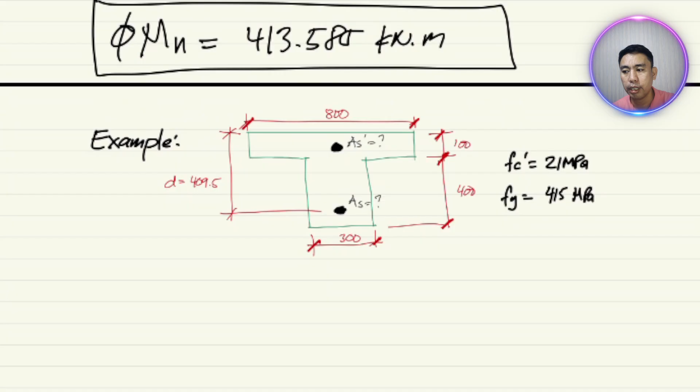Okay, so we'll stop from here. Our next topic will be about shear reinforcement, yun yung stirrups. Thank you.